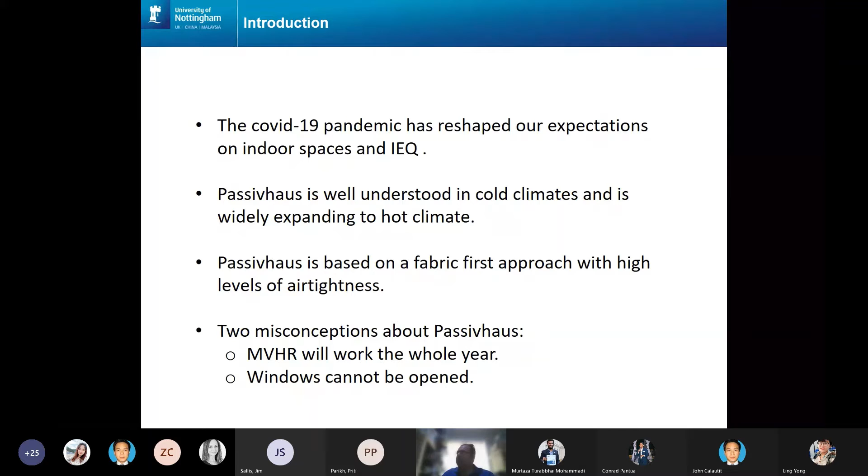So perhaps there is a bit of work to do in telling people how to use it, but there are many benefits. I just wanted to highlight what a mechanical ventilation system with heat recovery is, the way it works in a simple, compact system for a passive house. I'm talking about domestic, and the main thing is that you've got a couple of filters. The filter for the air coming from the outside is actually an F7 filter that stops really small particles. The one that is filtering the inside is not as good, but of course it's not as expensive either. So we are doing a little bit of work about what we can actually do with this filter and what is captured there.

If we can use it, for example, trying to analyze how the air quality is in the houses and actually from the outdoor as well. The other important thing is that with many of the issues that we are seeing at the moment, you cannot be recycling the air, because if, for example, there is any kind of contamination, you are just basically spreading it even further. And that was probably one of the surprises that we've been getting with COVID, is that you need to open windows, you need to have fresh air.

So in any of these systems it is fresh air all the time. There isn't any kind of recirculation happening. The only thing is a non-physical transfer of the heat from the indoor to the outdoor, but there is no physical contact or contamination at all. So that's probably a good thing to have in terms of having a mechanical ventilation system.

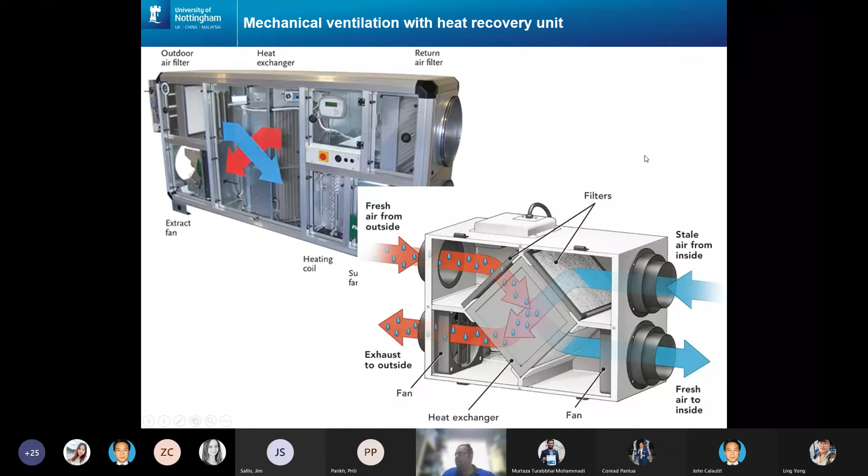And just borrowing a quote from Peter Drucker, who was very much involved in management, but it really applied to us very much: basically, if you don't measure it, you cannot improve it. So we talk so many times about having good ventilation or having really good thermal comfort. Yeah, but if we don't measure it, there's not much we can do. I'm really impressed by the work that we've seen today on how much monitoring is actually happening and the scale of that monitoring as well.

So I will tell you just a little story about two houses. On the left-hand side, we got property A. On the right-hand side, we got property B. I put them more or less to give you an idea of the scale, of course. Property B is very big. It's roughly the size of 2 or 3 average UK houses. Both of them are placed in London, not far from King's Cross station.

And just to give you a little bit of background about the two properties, the property on the left is basically a more simple approach. Both of them are EnerPHit Passivhaus, so basically they are retrofitted according to the Passivhaus standard. But on property A, it is a much more simple approach. The fabric has been upgraded to Passivhaus level. The air tightness has been upgraded as well to that retrofit level that we need to achieve.

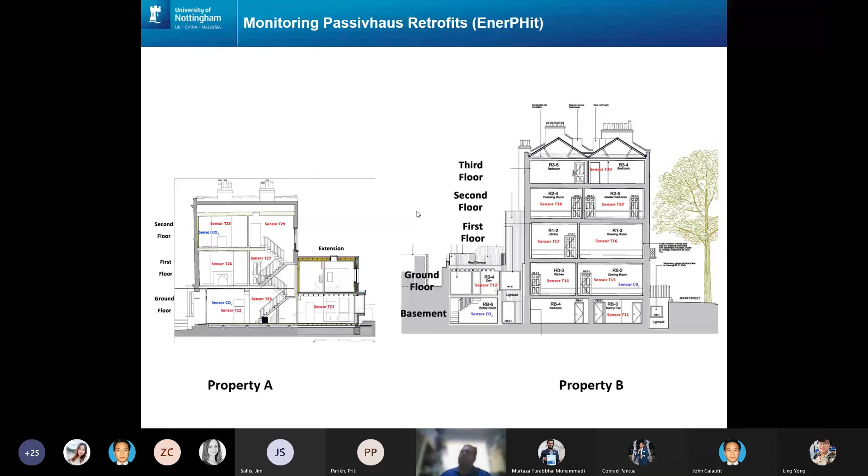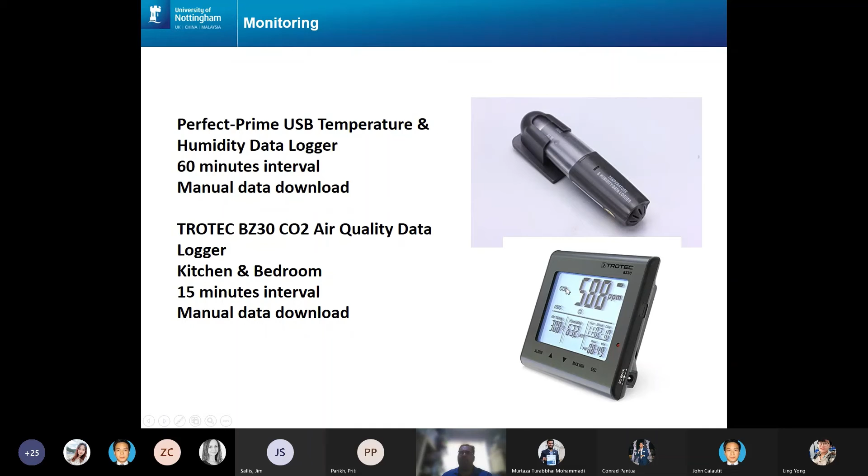Thank you. I'm sorry. So the reason is to really go and look at it. I have just a very simple system to measure temperature and humidity. We are measuring about every 60 minutes, but we are more interested as well in the CO2 concentration, which we are measuring every 15 minutes. So if I compare the graphs, property A, the most simple approach, has the temperature in the range that we are expecting. We designed for 20 to 21 degrees. That's where it's staying.

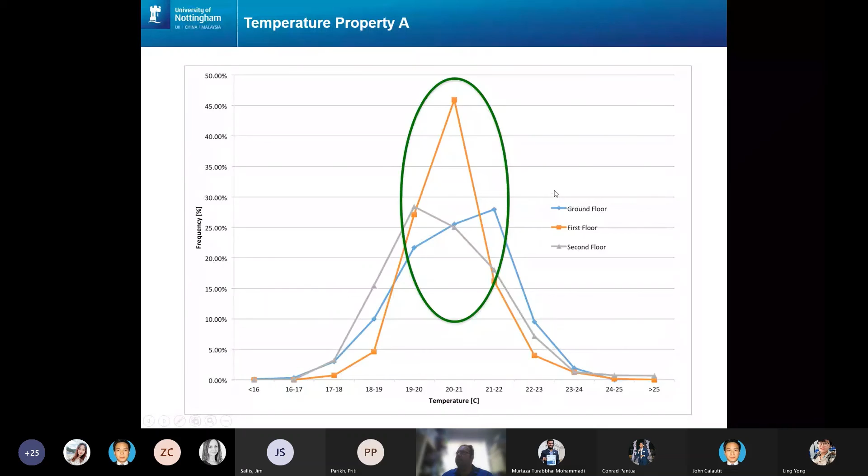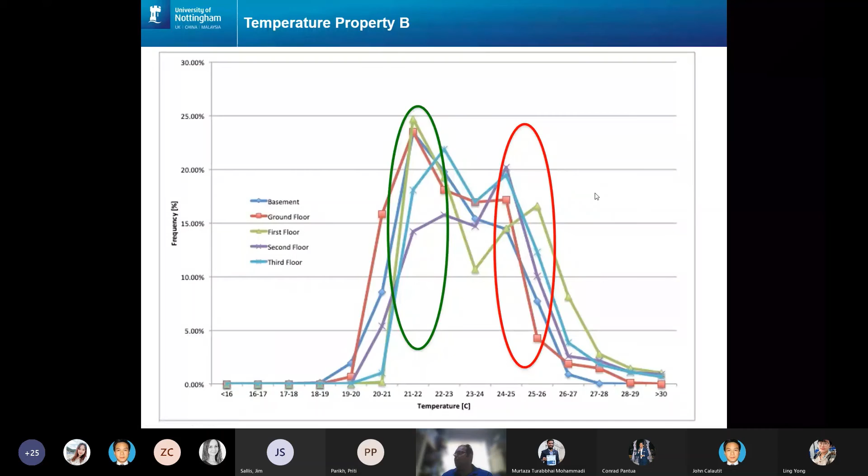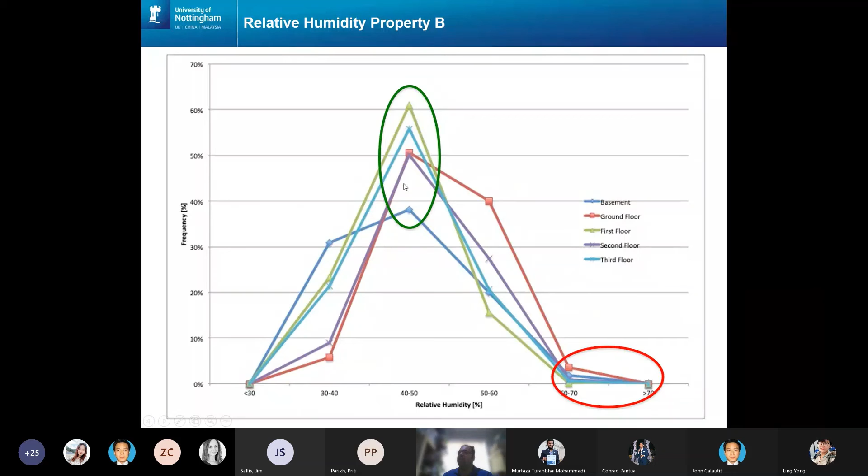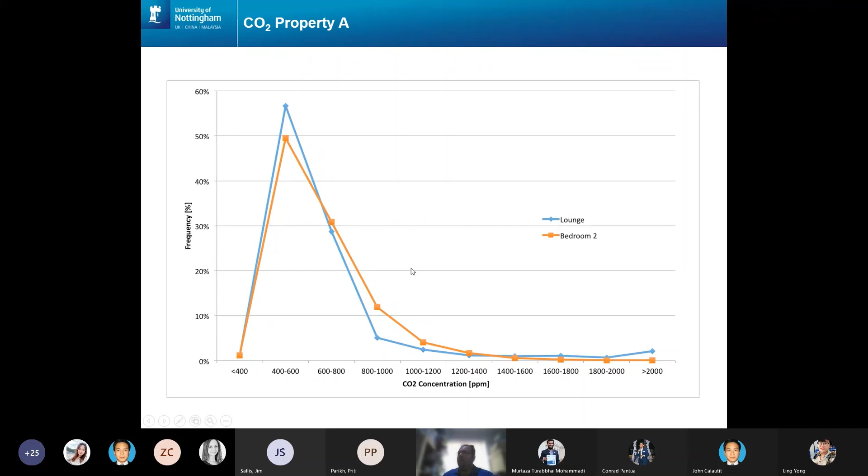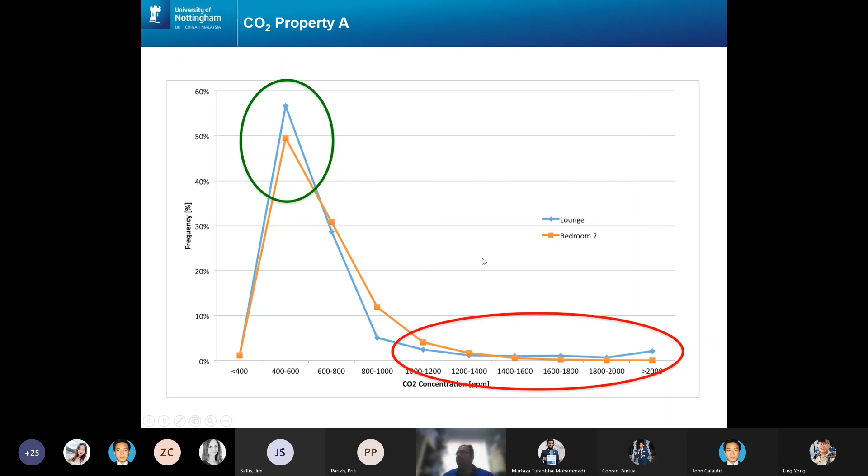And quite interesting is that we're looking at less than 1,000 CO2 concentration. Obviously, now with COVID, we are using it as well as a measure to know when we may have some problems. So it's quite nice to see how we are very much away from these troubles in the smaller property with a more simple approach, and it's pretty similar to what we have with a house where we put all the technology to really work.

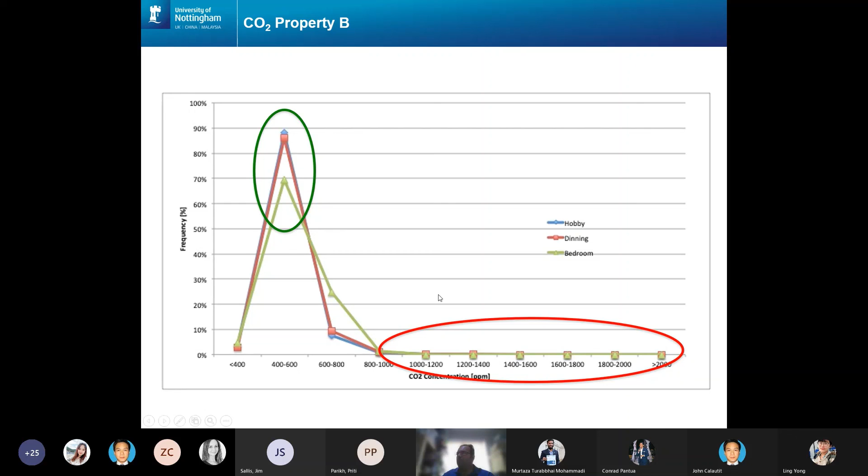So for me, the conclusion from looking at different approaches is that technology by itself may not be the answer for something to be successful. We need to achieve flexibility. We need to give the users the option to be able to interact with the system, to be able to work with the system. The main reason for me is because we have two different routes. One where they want technology to drive everything and to take the people away. And on the other hand, there are people like myself that think it's much better to actually work with the users, help them to really understand the building and help them to make it comfortable for themselves.

And I think the data is clearly showing that CO2 concentrations are very well under control, no different between one property or another. And thermal comfort actually seems to be much easier to achieve in a simple approach, where people can actually work with the way that they feel about the thermal comfort and the state of the house. And I think that probably gives the opportunity for more retrofitting in this approach.